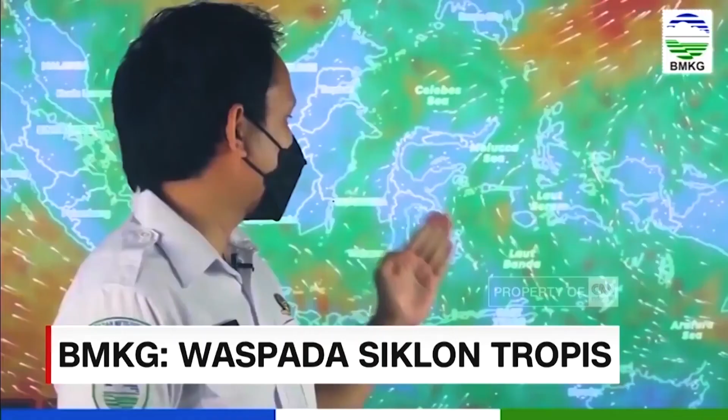There are more extreme examples of what happened in our environment today that show that it is increasingly more uncomfortable to live in. How could we ever hope to enjoy this with our descendants 100, 1,000, or even 10,000 years in the future? Let us find a way to return nature to the way it was supposed to be starting from now. How? We introduce the concept of green building.

It is one of the many ways to contribute largely to the conservation of nature that we hope for. Will we be able to return nature to the way it was like two decades ago? Many countries have concentrated around the management of environment and nature. Japan, Brazil, China, European and American countries, and many more.

We, as the citizens of Indonesia, cannot let ourselves be left behind, especially when we are dubbed as the lungs of the world. If our lungs were to be unhealthy, or dysfunctional, we would be very sick or even die.

In Yogyakarta, many buildings have adopted the concepts of passive design with the primary goal to achieve comfort and energy efficiency and savings. Passive design is one of many ways to achieve the balance of nature. We use it in existing buildings by renovation, adjusting to the local climate and weather, or designing a new building to adopt passive design technology before it is built.

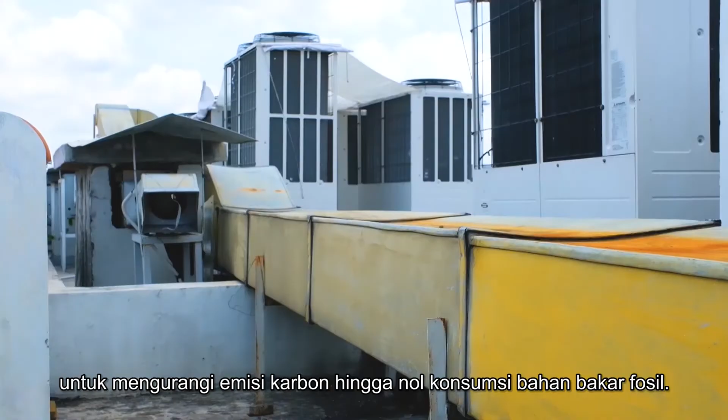Passive design is designed to create energy efficiency compared to regular design. Architects do this besides energy efficiency to reduce carbon emission until zero consumption of fossil fuel. They also put attention to the building orientation, local climate, and wind direction.

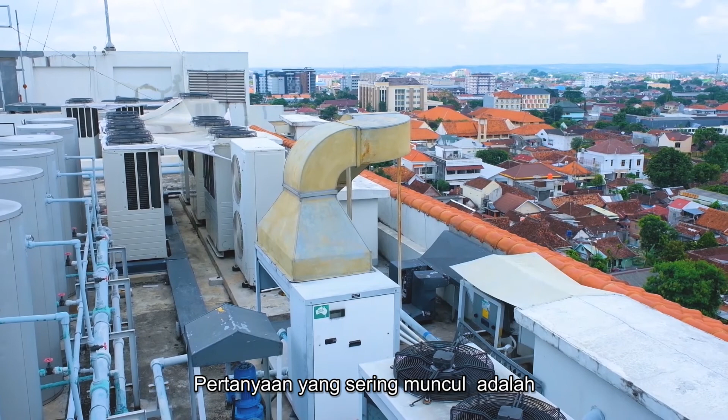The question that is frequently asked is whether passive design is relevant. The short answer is no, if we take into account the daily activities that we do, like working or going to school. But if we want to stay still for a while and reflect about our life, passive design becomes very relevant.

The human lifespan is minuscule compared to the age of Earth and the universe. Living 70 to 80 years has already been considered a blessing of long life. But with the 80 years that we have, have we ever thought about how to make our lives more comfortable and healthier? So that we could enjoy the remaining time that we have well spent, comfortable and healthy.

Does it feel like the temperature around the house has been hotter lately? Do we feel that the sun's rays have been a lot more stinging in the past few years? Does it feel like the air conditioning that we have does not feel as cool anymore, to the point of considering upgrading or purchasing an additional unit, to the point where the electricity bills balloon every month?

One of the many things to consider is that electricity bills per kilowatt hour are only getting more expensive by the year. But the supply of electricity energy does not increase proportionately with the energy demand.

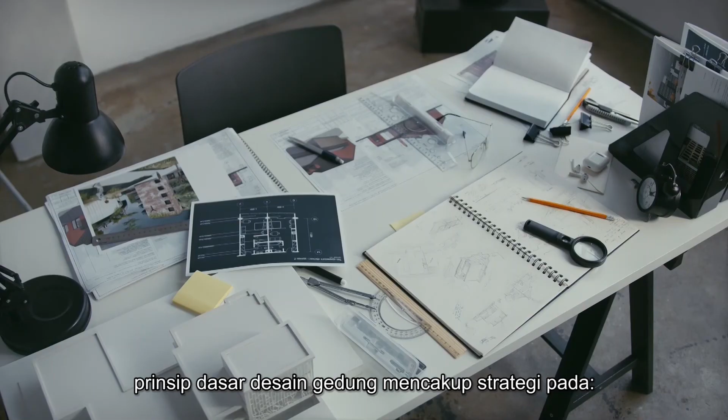Related to passive design, the basic building design principles cover the strategies on site development, building layouts, envelope composition, and the development of building interiors. This video will discuss the passive design strategies in the building of Universitas Ciputra.

Universitas Ciputra is located in the middle of a residential and commercial area in Surabaya, East Java Province, Indonesia. The building of Universitas Ciputra is designed by a famous Indonesian architect, Bapak Yori Antar. The first building was built in 2005, and the second building, the UC Tower, was built in 2020. By using this building as the case study, we can learn how passive design strategies are implemented, how the building responds to the climate to achieve users' comfort.

Site development here includes the arrangements of the site and the building mass, as well as the ground cover, landscape, and building orientation. To reduce energy use in air conditioning, site arrangement should support the creation of good airflow between the building masses. The good airflow here is a potential for the outdoor air introduction in each of the buildings.

To reduce energy use in active cooling, efforts must be made to minimize the heat gain. Heat transfers from an area of high temperature to an area of low temperature. So, to minimize heat transfer from the outdoor to the indoor buildings, the outside air temperature must be kept low.

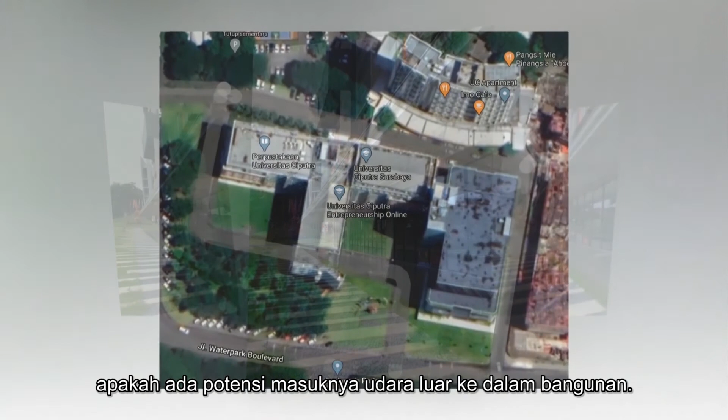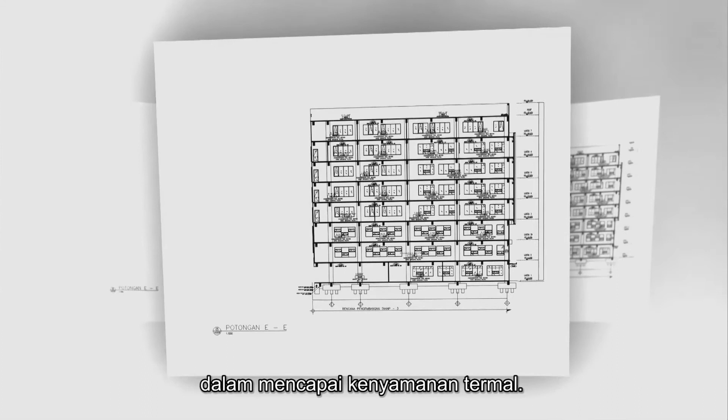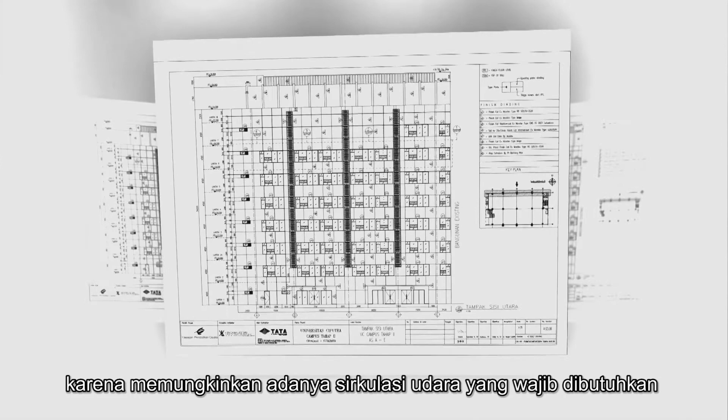The type of opening in the building envelope determines whether there is a potential of outdoor air introduction into the building. A large window-to-wall ratio will be useless if the openings implemented are not operable openings. Operable windows are applied at UC. In this case, it is very beneficial because it allows users to have control in achieving thermal comfort. They can open or close the window anytime to adjust to their thermal comfort zone. In the new normal conditions, operable windows also provide other advantages because they allow air circulation, which is mandatory to create a healthy building.

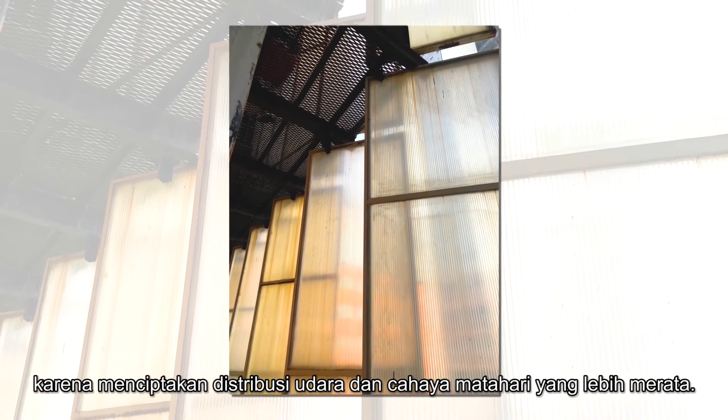The UC building uses bright colors as its interior finishing. This strategy is applied to increase the reflectance and distribution of natural light. The indoor space with the open plan concept at UC is also very beneficial because it creates a more even distribution of air and daylight.

The decision is now in our hands. Do we desire a better life? Do we desire better health? Do we want our children and grandchildren to be able to enjoy the same comfort and health that we have eons in the future? Passive design has become one of the solutions for prospective and existing buildings that can achieve all that we need. Surely, all this must also factor in the geographical location. Building orientation, room layout design, shading placement design, building materials, window placement, etc. will be the main factors that must be considered when building.

It is not too late for existing buildings either to change and adjust to the concept of passive design. If human skin could be rejuvenated, could the skin of the building also be rejuvenated with environmentally friendly material? Let us begin with affordable materials. If we began to sense the benefits, we would concentrate on doing more with our buildings. The main point of net zero building is to use passive design so energy-efficient buildings can be built. As you can see in the flowchart of Greenship Net Zero Healthy below, beyond green, we have to put health as our priority.

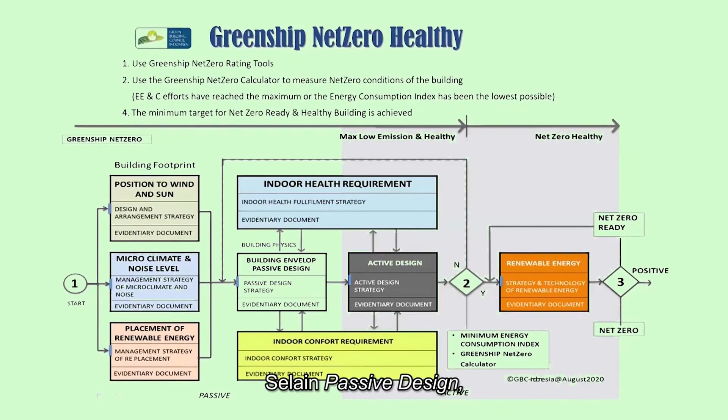Other than passive design, we could also utilize net zero water and renewable energy. All this will be studied in the next episode. Let us step forward with simple steps. And if these simple steps are done with tenacity and by many people, then it would surely have a great effect on the world.